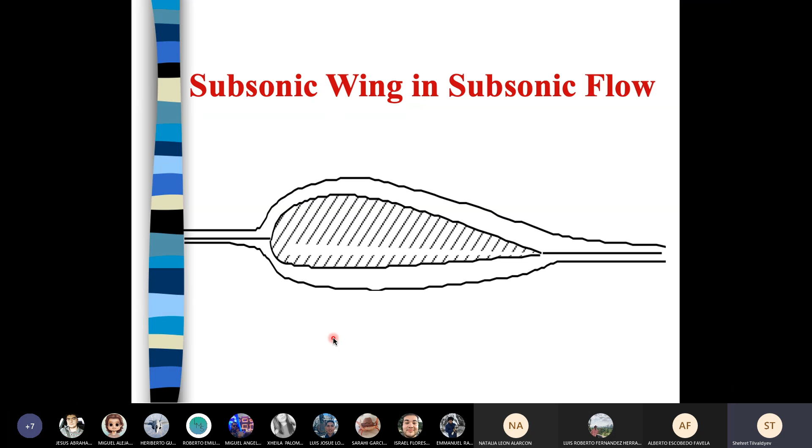Here velocity increases, and as a result on top pressure decreases, creating lift force, an upward force. This is a subsonic wing in subsonic flow. Now imagine this subsonic wing goes from subsonic to sonic and supersonic. Excuse me. What happens here?

Very first, in supersonic flow, just in front of the airfoil, in a large part in front, it induces air to increase density. It's compressing air in front, and it sticks to the airfoil. This part has very high air density. It piles up this air, and here it's Mach less than 1, because it sticks to the surface of the airfoil, and this high-density part creates very strong resistance.

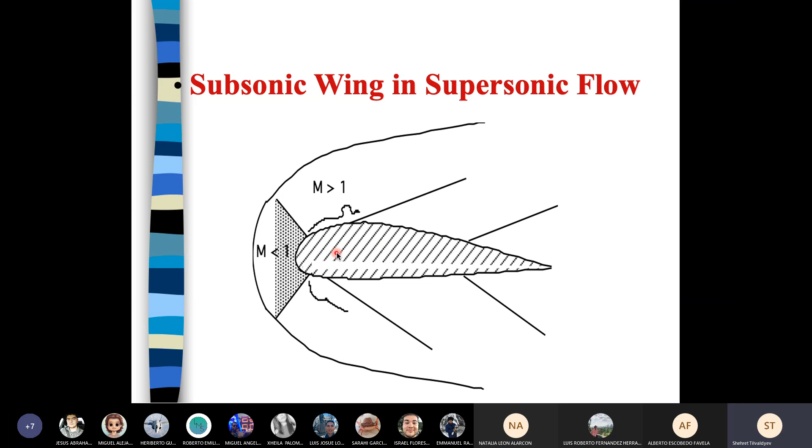Behind this part we have supersonic flow, with Mach number more than 1, and it creates a lot of separation points because of the form of the airfoil, and a lot of turbulence. So in general it's very negative for a subsonic airfoil to fly at supersonic velocity.

Next, a supersonic wing has a rhomb form. It's flat, this kind of form, not the traditional subsonic airfoil form. This is a supersonic form. What happens when it moves with subsonic velocity? All around this airfoil there's a lot of air separation, because air is not changing density, it's acting as non-compressible. It separates from every edge of this airfoil, with a lot of separation and a lot of drag, and it creates just a little lift.

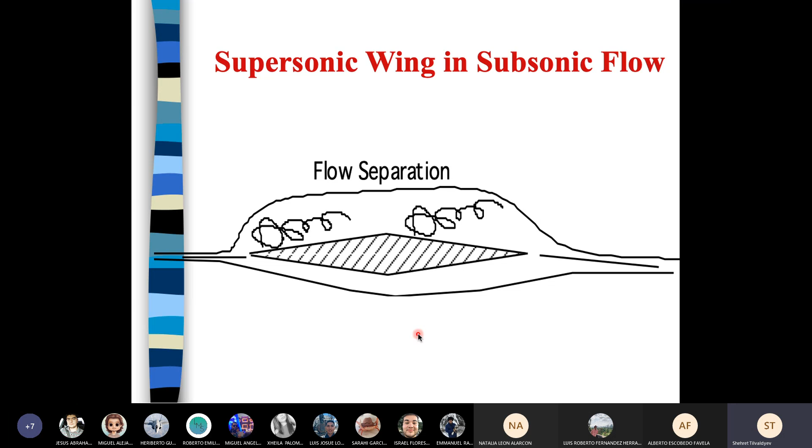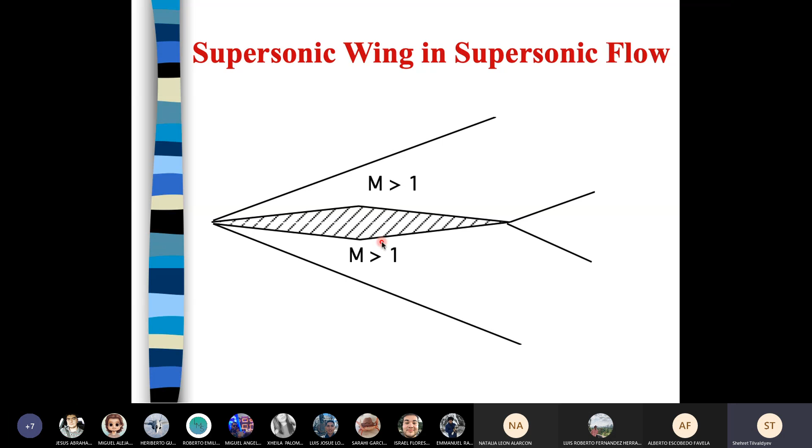But when this supersonic airfoil goes to supersonic flow, it works perfectly, because there are no separation points, everywhere the Mach number is more than 1, and it's a very efficient flight with minimum drag. So a subsonic wing in subsonic flow is very good. A supersonic wing in supersonic flow is very good. A subsonic wing in supersonic flow, problem. And a supersonic wing in subsonic flow, also a problem.

This is general information about the form of the wing and the velocity of the airplane. In subsonic flow, it's non-compressible air. With supersonic flow, it's compressible air, and it's not good for the subsonic airfoil. And the supersonic airfoil is not good in subsonic flow.

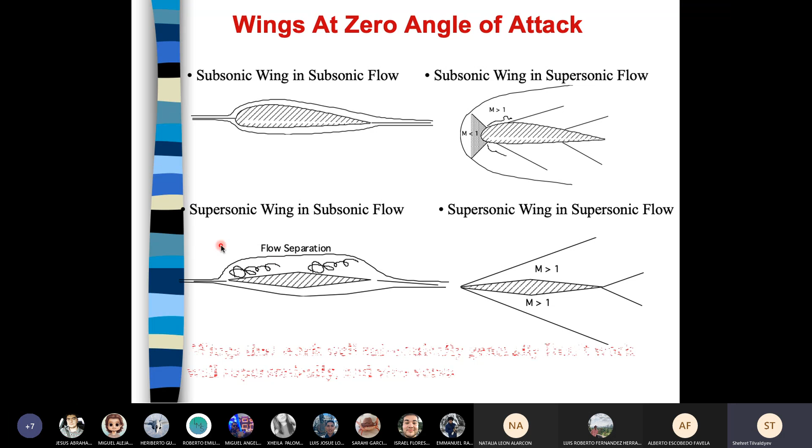So here a little bit about another problem: aerodynamic heating.

When an avion goes, not just an avion, let's say any flying object like an avion, it could be a rocket, it could be a missile, any moving object in air. When it goes to a Mach number more than 1, the stagnation points increase the magnitude of the arrastre. Stagnation points in an airfoil are the very front part and the very rear part of the airfoil. At a stagnation point velocity equals 0, so pressure is maximum. That's why at the stagnation point it's always creating huge arrastre.

Plus, when the airflow goes to supersonic speed, temperature increases. Temperature appears because of friction of the surface of the solid with air. Air has density, and this density creates very strong friction. It's difficult to believe the first time that air can make the surface of a moving transport melt, get rojo, get into a plasma condition. Faster velocity, greater temperature.

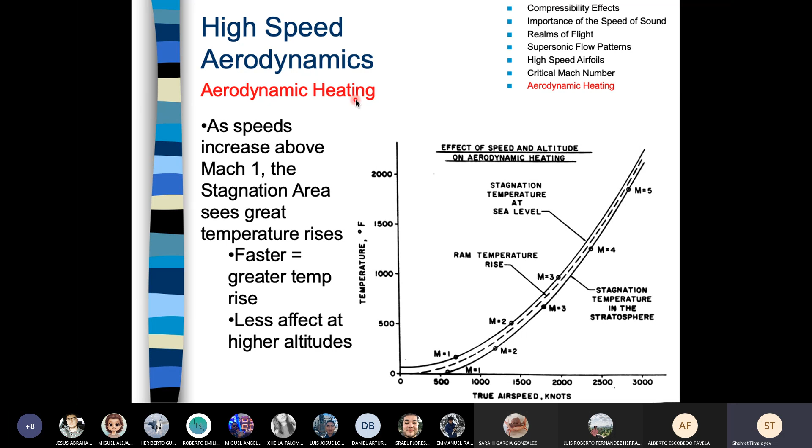Questions so far? This information was from the previous class, I guess. Questions so far? No? No, teacher. No.

Now a little bit of math about wing planform. ¿Por qué? Porque so far we spoke about the cross section of the wing, the airfoils. Now you understand that we have subsonic airfoils and supersonic airfoils. Planform, in general, there are 1, 2, 3, 4 types of wing planform, that if we see from the top or from below the avion, it has these formas. Just wait, because I cannot see.

The very first is the rectangular wing, straight rectangular forma. Elliptical wing, from the word ellipse. The third one is the taper wing or moderate taper wing. It has a kind of trapezia forma. And swept back wing, sometimes we call it delta wing or flying wing. It's the form of the wing of the avion for sonic and supersonic flights.

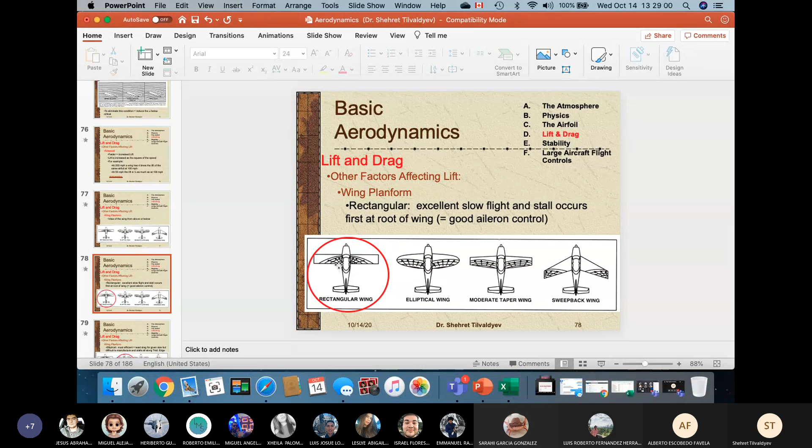Next one, elliptical wing. It's more efficient. ¿Por qué? Porque this ellipse forma is a smooth, nice forma. It doesn't have sharp edges. That's why it's most efficient, creating less arrastre. But here is another problema. Compared to the first one, the production process of this forma is much more difficult. The rectangular is simple; this one is much more complicated, so it's more expensive. Stalls concentrate all along the trailing edge, separation points everywhere along the trailing edge.

Next forma is the moderate tapered wing, a trapezia forma wing. This forma, mixed, we have in our Cessna 182 in our laboratory. It's more efficient than rectangular and easier to manufacture than elliptical. But still, during flight, arrastre and separation points concentrate along all the trailing edge of the wing. See this area.

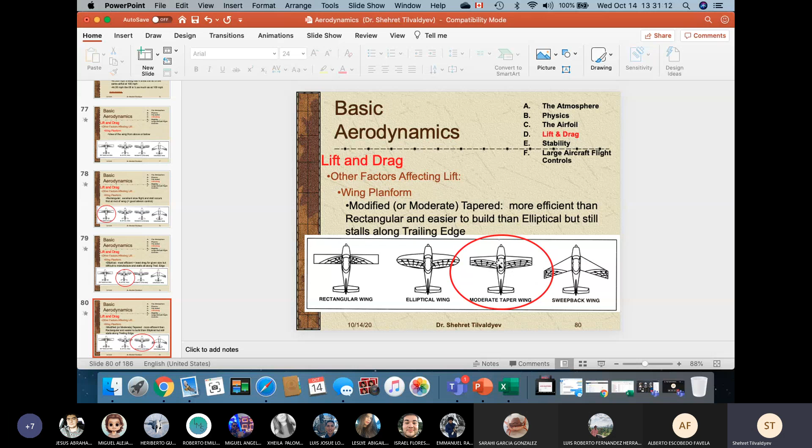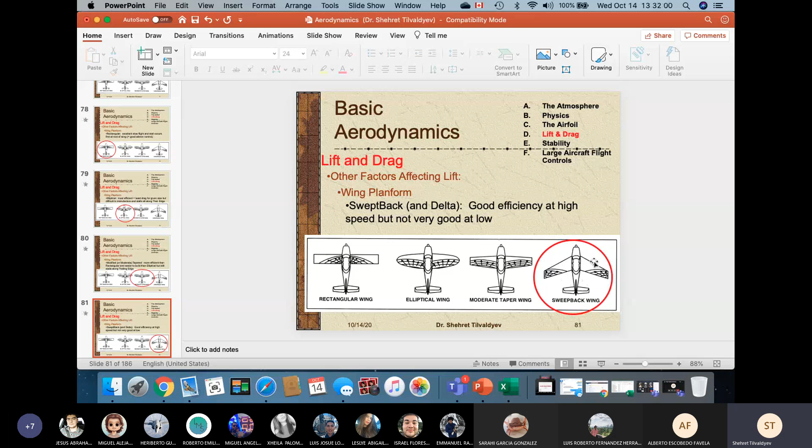Next one, swept back or delta or flying wing type of avion. This one is good for sonic and supersonic velocity, but not really good in subsonic. But remember, this avion cannot fly from zero velocity right away to supersonic. It first goes to subsonic and after to supersonic. So part of the flight is in subsonic speed: when taking off and increasing velocity, and when going to landing, it slows down from supersonic to subsonic. In both stages in subsonic condition it's not a problem, but it's not efficient.

Not efficient. ¿Por qué? Porque to create lift it has to increase velocidad. With very high velocity, the landing process is poquito different. Not difficult, that's not the right word, it's specific. That's why these avions have high velocidad on landing, and they need additional devices to stop, for example parachutes. Parachutes help reduce velocity on landing, because landing is done at high velocidad.

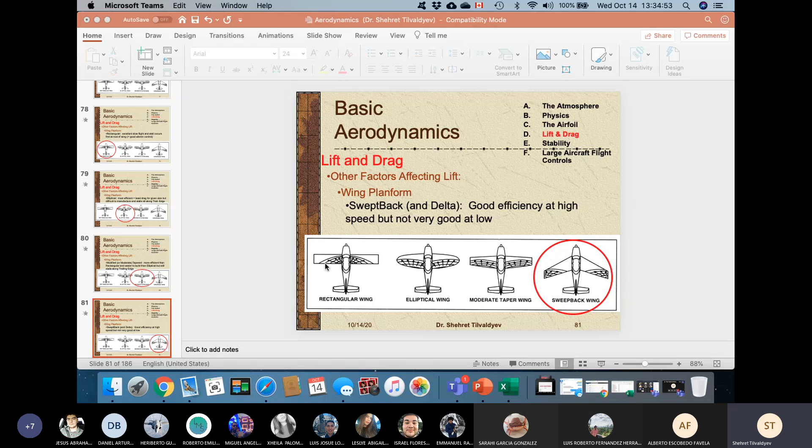So these are 4 general types of wings for the airplane, just general types, because the second and third types, we may have a combination of these two, like in our Cessna, it's a combination of the second and third type. The first type is just for very slow airplanes, because with less velocity, the large surface of the wing creates a lot of drag. It doesn't let you create very high velocity. But if you use a propeller with a very efficient internal combustion piston engine, you can easily fly short distances with very high efficiency with this kind of airplane.

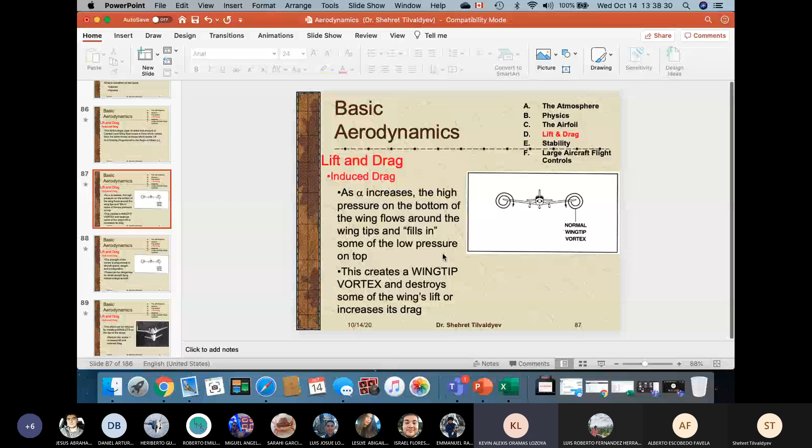So this is the information I was supposed to present today: aspect ratio, and a refresher on the forms of the wing, which depend on velocity and whether the flow is compressible or not. Now you know the coefficient of lift, coefficient of drag. Now you know about center of pressure and aerodynamic center. Now you know the form of the wing for subsonic and for supersonic.

And we are going to make some laboratory work this Friday. I am going to wait for invitation approval, okay? If I invite you, we are going to have class. After this laboratory, you are going to make some calculations and some reports.

After that, I'm going to go a little bit into the movement of the airplane in 3D space, and what part of the airplane controls which movement. This is necessary for you to understand altogether the aerodynamics, form of the airplane, and the parts of the airplane controlling it in different conditions and at different velocities, like subsonic and supersonic, for example.

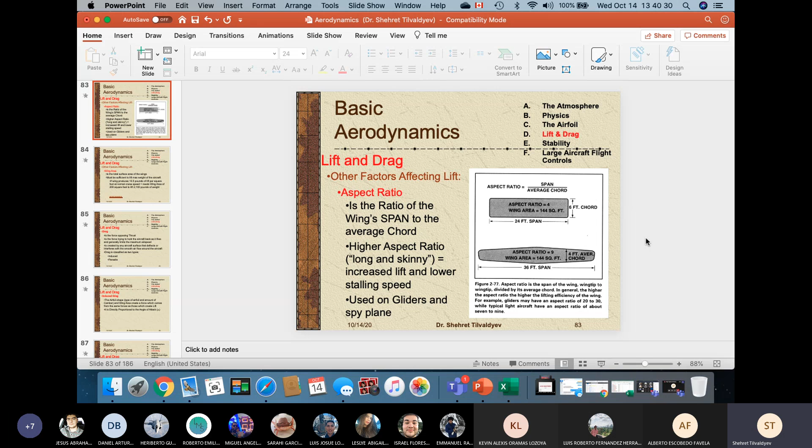And that's it for today. Any questions? I don't think so, teacher. No, teacher, thank you. Well, okay.

So please, people, Friday, I promise, so far I am positive that we are going to have laboratory class. But I don't know for sure if it's going to be possible, because of this coronavirus situation. People are telling me it's likely going to go red again, and maybe some restaurants and cafes are going to be closed. So if you want to go dancing, do it today or tomorrow. No, it's maybe next week everything is going to be closed again. I don't know, but I hope we are going to make this laboratory activity this Friday. So far it's positive, but I'm not 100% sure.